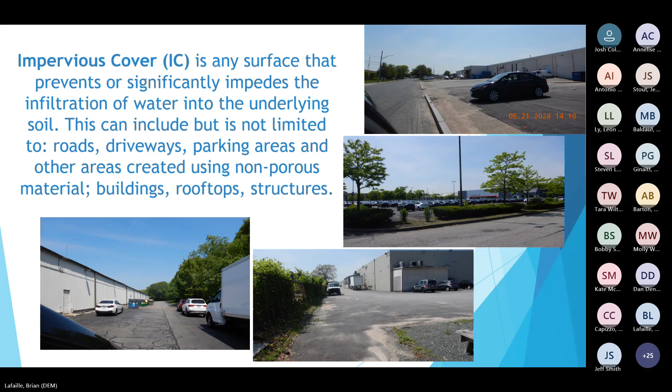Getting into the properties that are subject to the general permit, as we said during the permit process, this permit applies to properties with 1 acre or more of impervious cover within the Mashapaug watershed.

There are a total of 59 properties that are subject to the permit, 29 in Cranston and 30 in Providence. Of those properties in each city, there are 2 tiers. In Cranston, there are 3 properties with 7+ acres of impervious cover and 26 in the 1 to 7 acre category. In Providence, we have 30 total properties, 4 of which are 7 acres or more of impervious cover and 26 are 1 to 7.

I would like to also emphasize that this permit applies to the legal property owner. They are the entity that's responsible for complying, not a tenant or a site operator. This is different from our industrial general permit, where the site operator is the party that's responsible for complying.

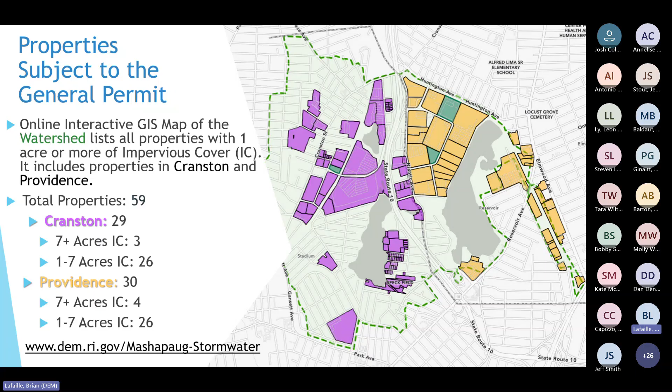Next, I want to talk about how we address stormwater pollution on any given site. We use an adaptive management approach, whether it's an industrial site or a site with impervious cover within the Mashapaug watershed. There are 3 key elements to this approach, and all 3 are very critical. The order of implementation is also important, as each step makes the subsequent step more effective.

You're going to see these steps and themes throughout the permit, and throughout the presentation today. So the first step we want to take on any given site is to try to prevent or minimize the exposure of pollutants to stormwater.

The next step would be to perform good housekeeping on a property. Maybe on a property, you can't cover everything. You can't keep everything from being exposed. Then we want to take steps to keep a clean site, to maintain existing infrastructure and equipment. If you have vehicles that may be leaking, you want to make sure those are maintained so those pollutants don't come in contact with stormwater.

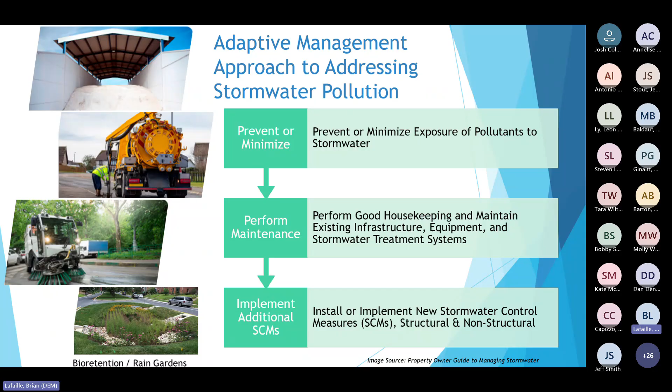At this point, I'm going to turn things over to Leon. He's going to go into the specific requirements that apply to properties with 1 to 7 acres of impervious cover.

Thank you, Brian. Like Brian mentioned, we're going over some requirements for properties between 1 and 7 acres of impervious cover. This is going to be a majority of the group here. Go to the next slide.

So we start off with minimizing pollutant exposure. This can be part 3A of the permit. The permit requirement is just preventing stormwater from contacting any pollutants, minimizing exposure of materials to runoff and rain, and properly managing materials, waste, and chemicals.

And how do you meet these requirements? Simply by keeping materials covered or contained if they're outside, storing waste and chemicals in protected areas, keeping dumpsters covered when not in use, and cleaning up any spills and leaks promptly.

Next, we're going to be implementing a good housekeeping program. This is part 3B of the permit, covering inspection and maintenance. We're going to go over catch basins and sweeping.

Catch basins need to be inspected twice a year: once between November 15th and December 15th after leaf fall, and once during April, usually after snow melts. Cleaning is based on inspection results. If the catch basin is above 50% sump capacity, it needs to be cleaned. If it's not over 50%, you don't need to clean it, but you still need to inspect it twice a year.

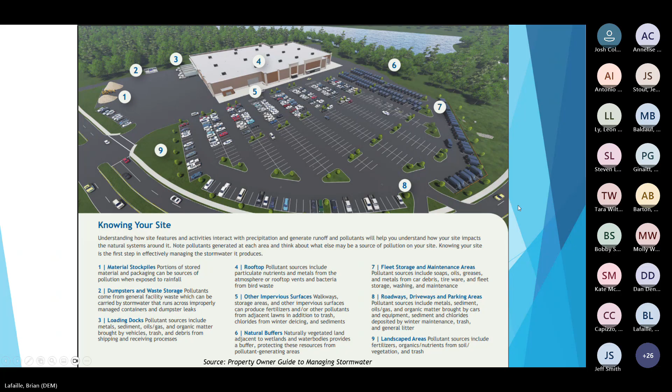There's another requirement: the green infrastructure and impervious cover reduction evaluation. This requirement is only an evaluation, not an installation. Property owners annually have to evaluate their site for opportunities to reduce or eliminate impervious cover, improve stormwater infiltration, reestablish aquatic buffers, and for sites planning capital projects, owners must evaluate opportunities to incorporate green infrastructure.

Even if no projects are being planned, property owners still need to evaluate their site annually for potential improvements. These evaluated improvements must be included in the annual report, describing and listing all identified opportunities on your site, and each year you must reevaluate your site for any new opportunities that come up.

There are also grants that might be available for properties between 1 and 7, since this isn't a permit requirement for them to be installed. You should be eligible to apply for those and get some funding to try to get ahead of the future requirements that are coming up.

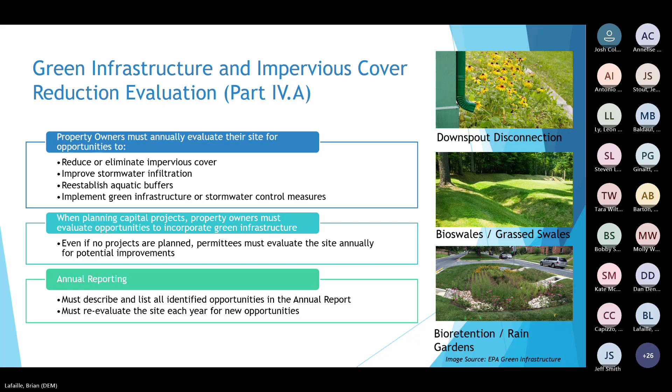You guys might already have some of this, but they need to be properly maintained and possibly upgraded to meet the criteria to be given credit for that. And then again, there's just any pavement that's not being used that can be converted so that it's not just sitting there unused. Usually a lot of pavement isn't always going to be used.

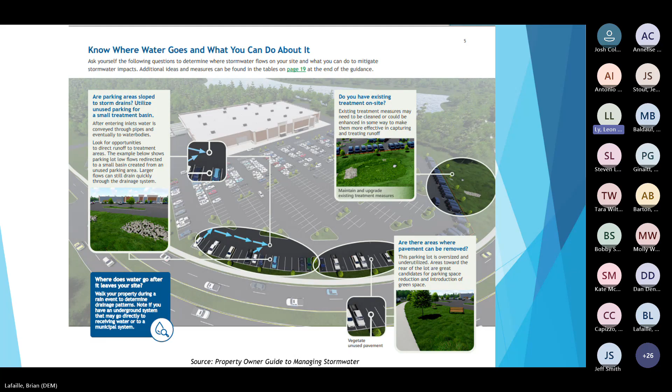Next slide. We're going to be looking at some key dates for anyone that's between 1 and 7 acres impervious cover.

So the first date is going to be October 1st, 2026. This is when the NOI, the notice of intent, is going to be due. So that's the first day that it must be due by.

And then we have November 15th to December 15th, 2026. This is going to be when sweeping and catch basin cleaning is going to start to be performed, and then it's going to be done yearly after that.

And then on February 15th, 2027, the annual report is going to be due, and the green infrastructure evaluation is also going to be included in that annual report. That's going to be due yearly after that also.

And then moving into April 2027, same thing - the sweeping and catch basin cleaning and infrastructure maintenance. That's going to begin, and that's going to be done yearly after that.

And lastly, we have July 15th, 2027. This is going to be when the annual fee is going to be due. So it's going to be $100, and it's going to be due yearly after that.

All right, next slide, we're going to be looking at requirements for properties that are 7+ acres of impervious cover. There's not too many - I believe there's only a handful of these. So there's going to be two parts I'm going to be focusing on: the stormwater management plan, the SWMP, and the stormwater control plan, the SCP.

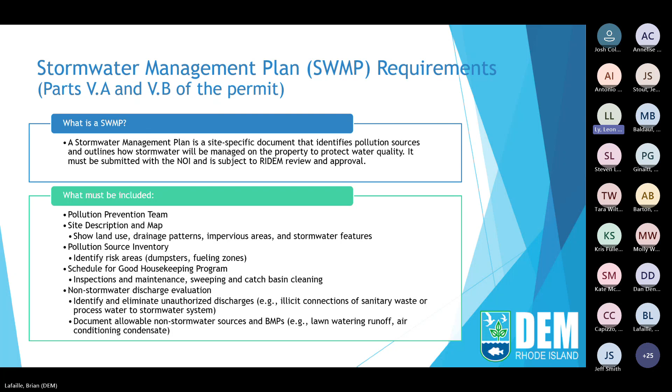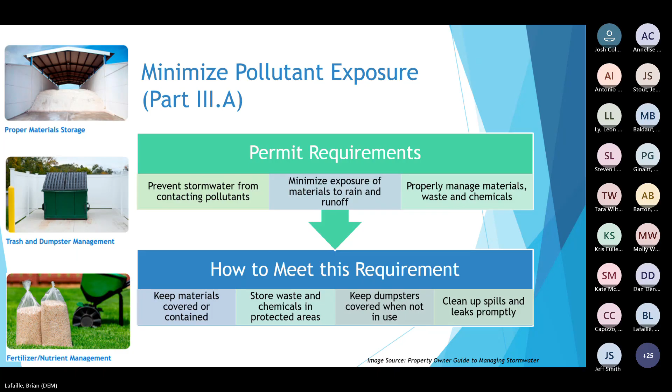So these next few slides are the exact same ones we just went over for the 1 to 7 acre properties. The only difference now is for the larger properties that are 7+ acres, they have to adjust these into their SWMP, but it's going to be the same exact requirements that we went through before. So I'm going to go over them very quickly. The first one's going to be minimizing pollutant exposure. Next is the good housekeeping program, so inspection and maintenance for catch basins and sweeping.

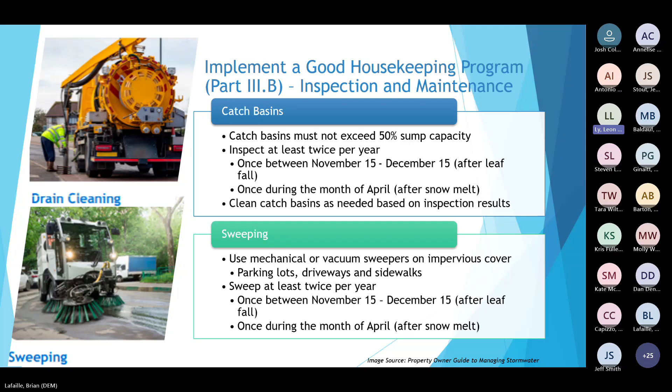Next, still in inspection maintenance, any other possible elements on your site that need to be inspected and maintained need to be included in the SWMP. And then we have minimizing impacts from major storm events, spill prevention, control, response plans, and the implementation of erosion and sediment control practices.

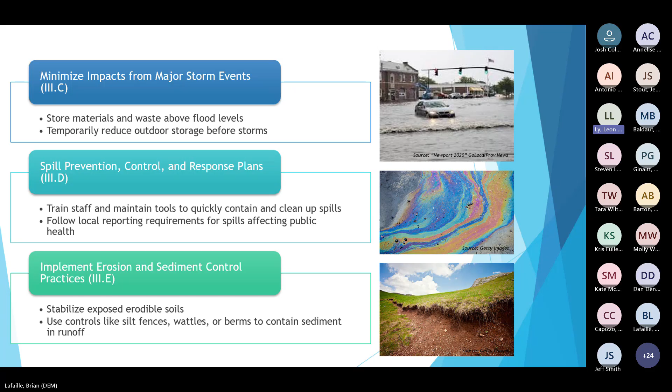All right, now we're moving on to the stormwater control plan. So what is a stormwater control plan? It explains how a property will meet its phosphorus pollutant load reduction target using approved structural and non-structural control measures, and is subject to DEM review and approval.

For stormwater control measure planning, the SCP needs to show how the site is going to achieve the long-term site-specific pollutant load reduction based on the receiving water. If your site discharges into Mashapaug Pond, it's a 65% reduction of your long-term site-specific phosphorus load. If it goes into Spectacle or Tongue Pond, it's 68%.

So we have an example here, the same example that's also in our permit. The SCP implementation for the first term is only 30%. So we're going to start with the site's phosphorus load. This is an example.

Say your site has 12.67 pounds per year of phosphorus, and it goes into Spectacle Pond. Your long-term site-specific reduction is going to be 68% of that load. So we take 12.67, multiply that by 68%, and you get 8.62 pounds per year. That's the long-term reduction for your site, 8.62 pounds per year. In the first permit term, we're only asking for 30% of that to be met, so it becomes 2.59 pounds per year.

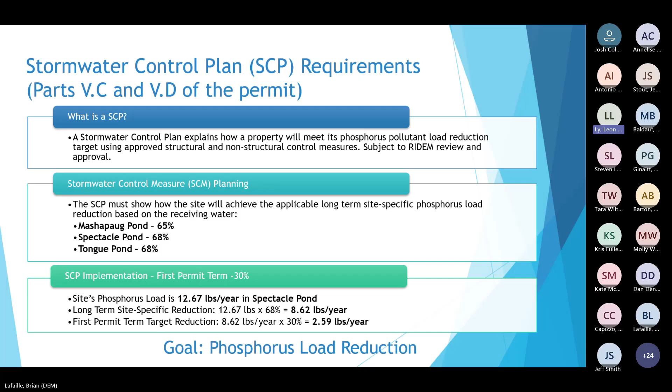Next slide. All right, so some requirements that need to be in this plan. You're going to need a site map and plan. This shows the sub-drainage areas and outfalls, flow paths, storm drain networks, any receiving waters, and any existing structural SCMs that are on your site.

Sort of what I mentioned before, the site-specific pollutant load reduction calculation. Site owners are going to have to calculate the phosphorus load from the site using existing impervious and pervious cover, and then apply either the 65% or 68% reduction based on which receiving water you go into.

From there, just inventory and accounting of SCMs and treatment credits. This includes any existing and proposed SCMs you're going to put on your site, and showing the amount of phosphorus reduction credit provided by each control. To do this, you have to use the approved crediting methodology in Appendix D, and you can use EPA's BMP accounting and tracking tool, the BATT.

Also in your plan, you have to include any non-structural control measures. This could be anything like sweeping or catch basin cleaning that reduces the phosphorus on your site. Lastly, we have the inspection and maintenance plan that needs to be included. SCMs need to be inspected and maintained properly to make sure that they function, and in order to get credit for the phosphorus reduction, they need to be properly maintained and documented as well.

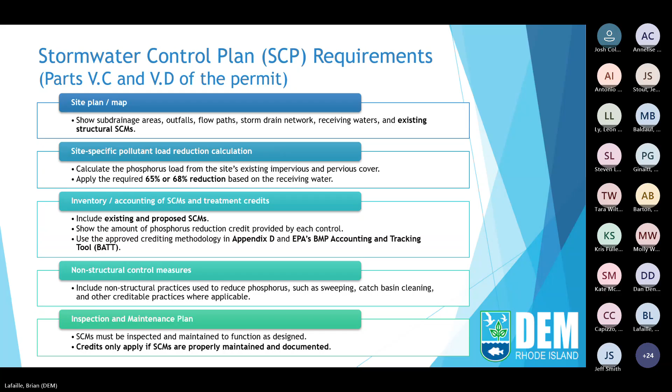The next slide we're going to go over is stormwater control measure crediting. These are just a few examples of structural and non-structural controls that can be used. First, structural controls can be anything like an infiltration trench, rain gardens, bioretention areas, or bioswales. For non-structural, we have things like an enhanced sweeping program, catch basin cleaning, and an enhanced organic waste and leaf litter collection program. We already ask that you're sweeping and cleaning the catch basins, but in order to get credit for that, you have to follow the Appendix D criteria to make sure you meet those requirements before you actually get those credits.

All right, next slide.